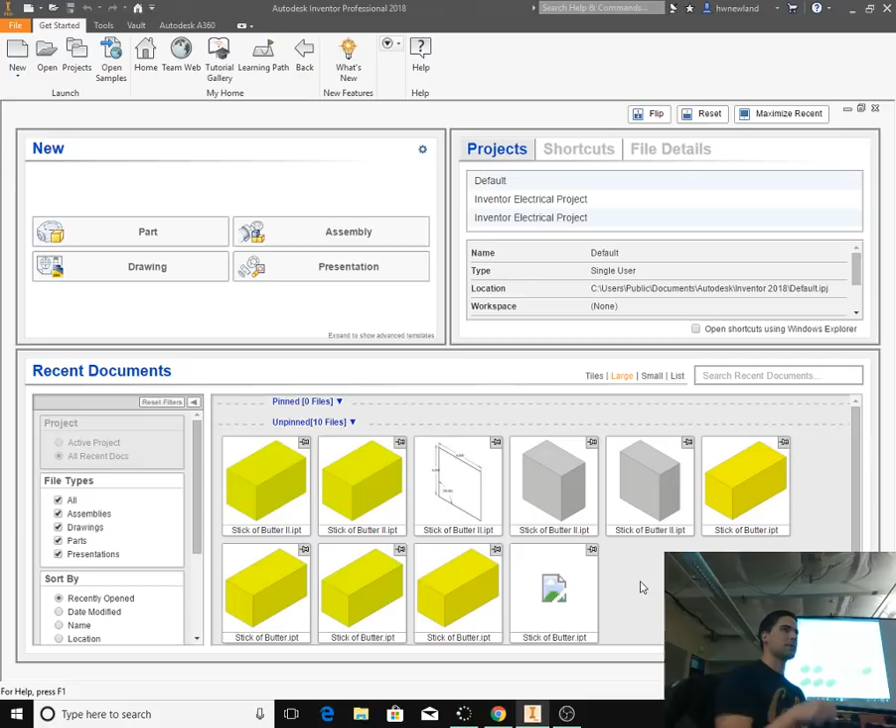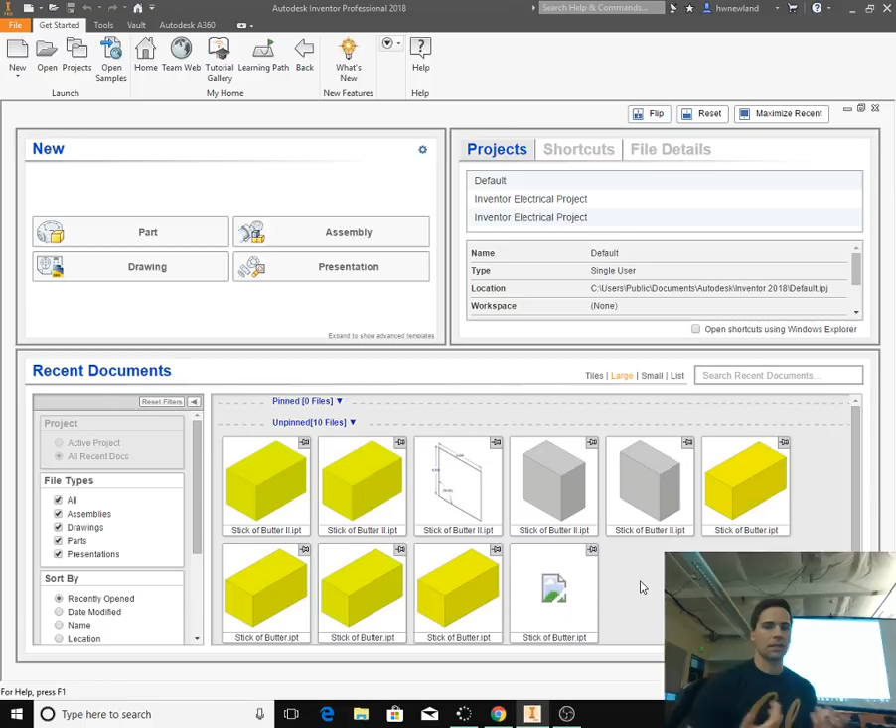So I want to make sure you guys understand how to create a sketch, come back the next day, and edit the same sketch. I noticed in a few periods students didn't quite get the gist of it, they raised their hands while typing, and when they brought up the sketch, they thought they were going to start a new sketch to finish it off. We don't want to do that because then it's not going to extrude. So we're going to practice that.

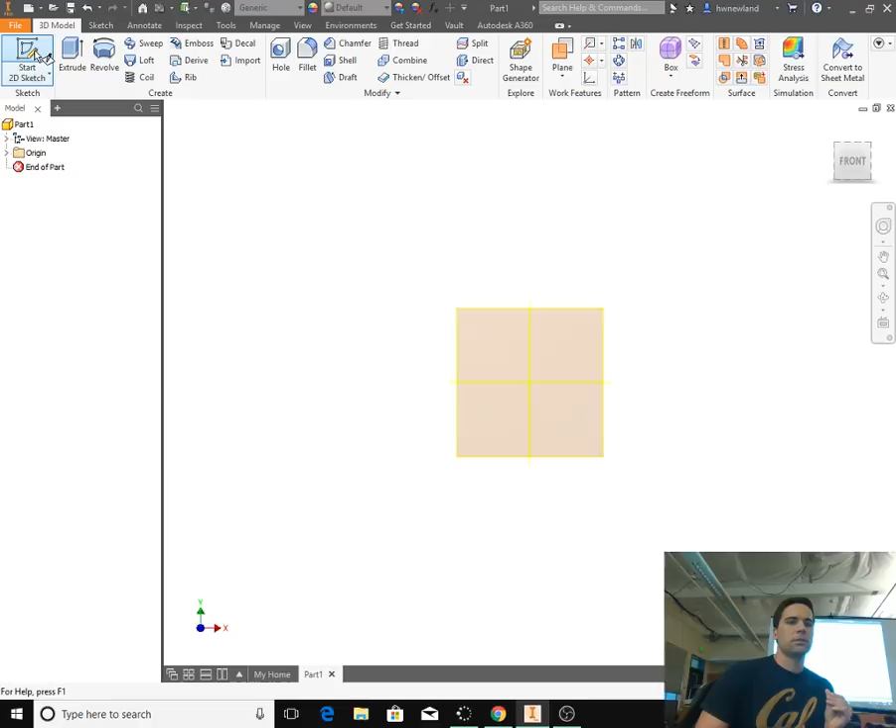I want you guys to create a new part. So create a new part. And we're going to start a new 2D sketch on the XY plane. So when yours loads, start a new 2D sketch on the XY plane.

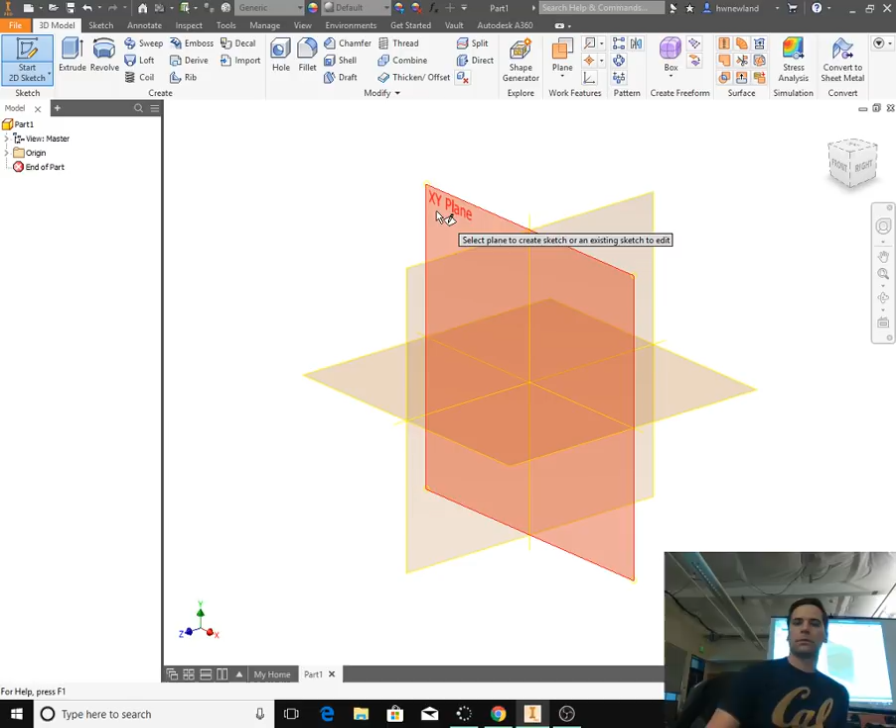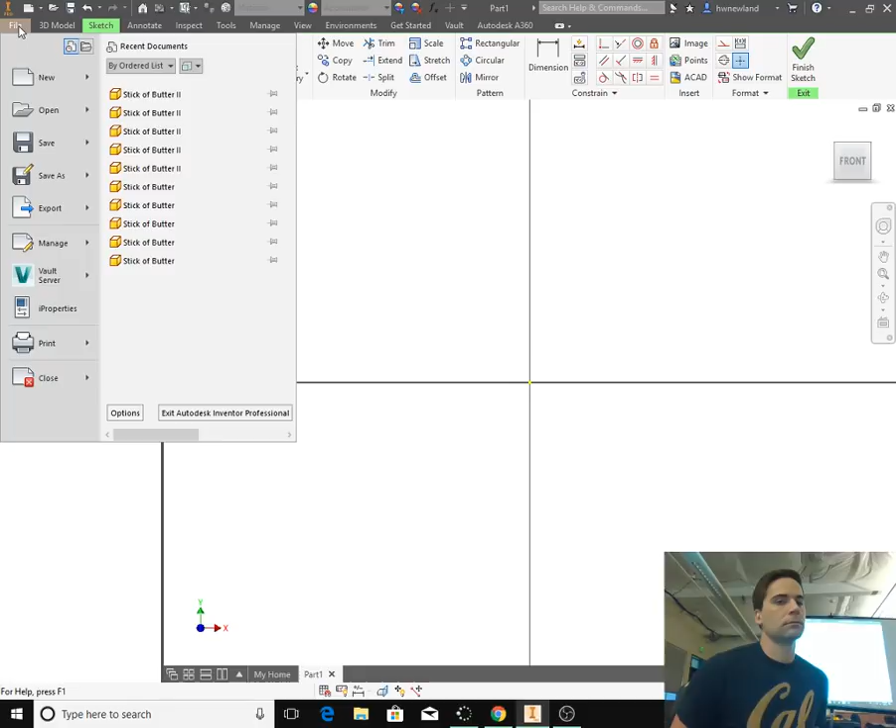Okay, so we're on the XY plane, and we need to save first before we start doing anything else. So let's go to File, Save As.

And then you probably have this pop up: you cannot save part 1 in sketch mode, would you like to exit sketch mode and continue saving? This might happen to you, and it's part of the reason why I wanted you to see this, because if you're in sketch mode and you don't finish the sketch, it's going to ask you to finish the sketch and then save it.

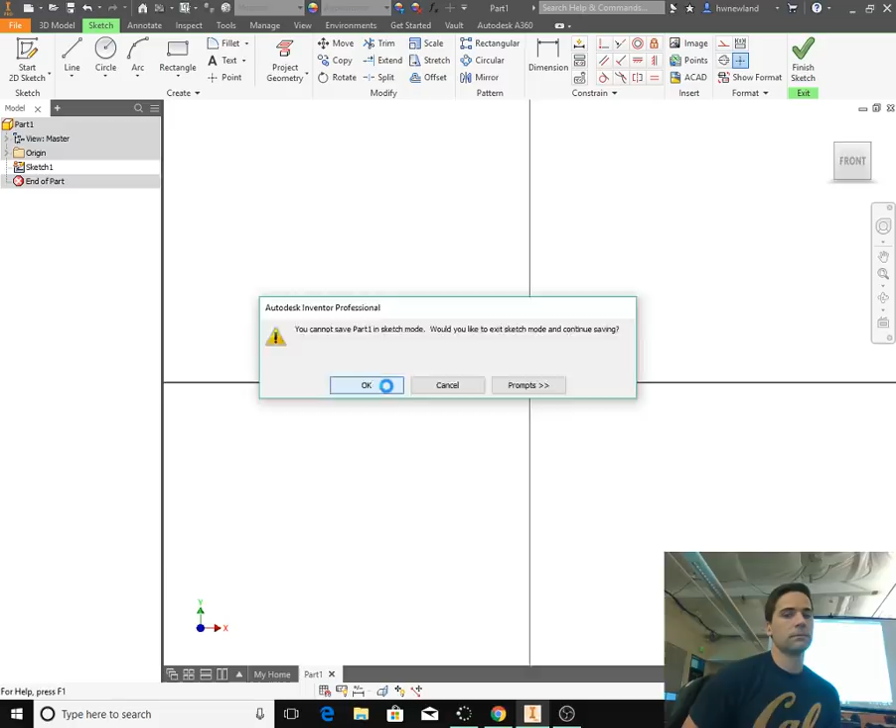So here's what we're going to do, we're going to click OK. And when you clicked OK, what happened, you probably didn't see this, but it switched from sketch to 3D model. So it basically hit the green check mark for you, which puts it back into 3D model.

And I want you to save this as, so this is not period 7, this is period 1. So Intro to Autodesk, that's where you guys save yours. Make sure it says Intro to Autodesk right here. I'm going to click on period 1.

And let's just write practice saving and opening. I'll zoom in. Practice saving and opening, we're just going to call it that because that's what we're going to try and do.

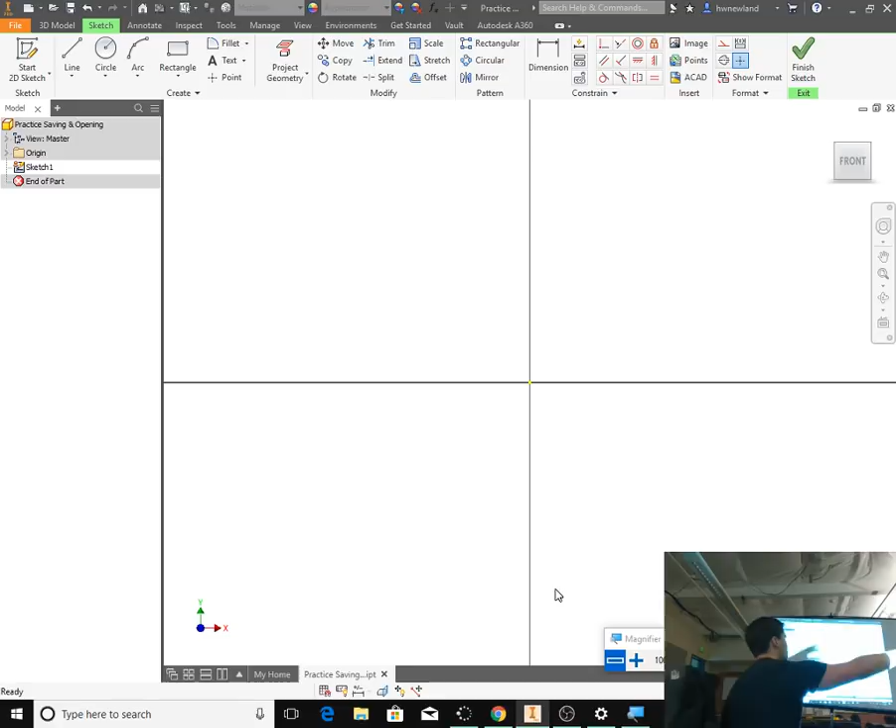The XY plane should come back. So we right click on sketch, we hit edit sketch, and then it brings us back to the original sketch that we were working on before we hit save.

So we're just gonna create a really quick shape, and it's gonna be different. I want you to pull down the plane so that we have quadrant 1.

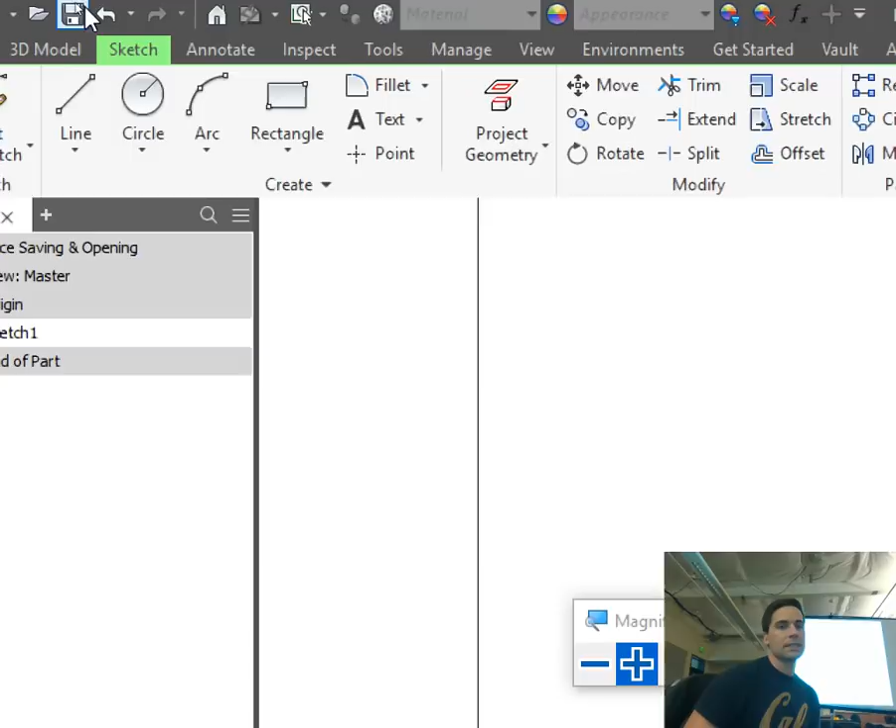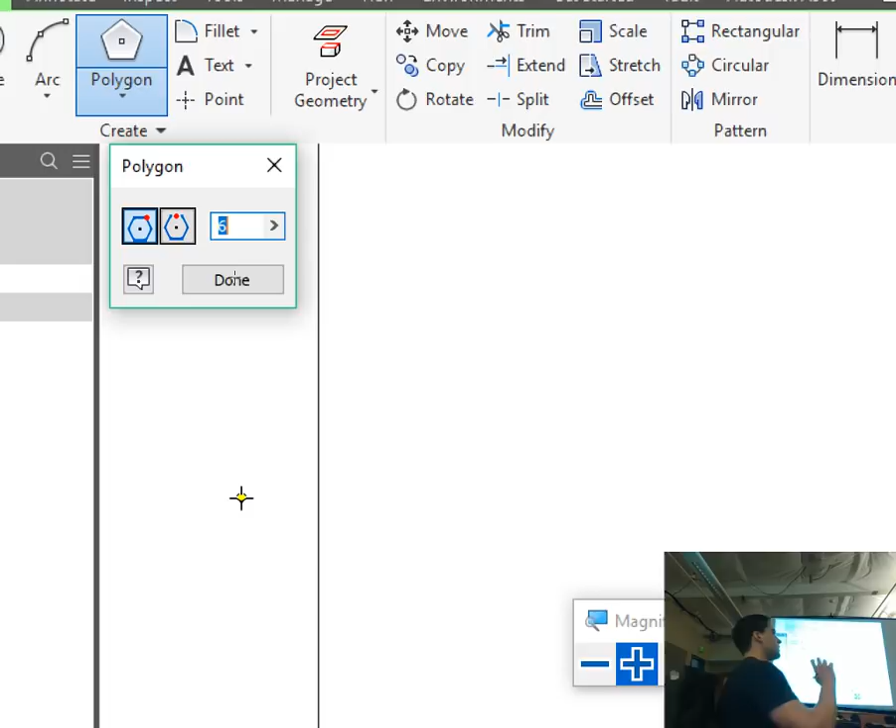And then I want you to choose this time, instead of rectangle, click the drop down arrow. I want you to choose polygon, it's at the very bottom. Choose polygon, and then notice this menu shows up asking you how many sides you want your polygon to be.

Let's try to make a triangle. So instead of 6 sides, let's change that to 3.

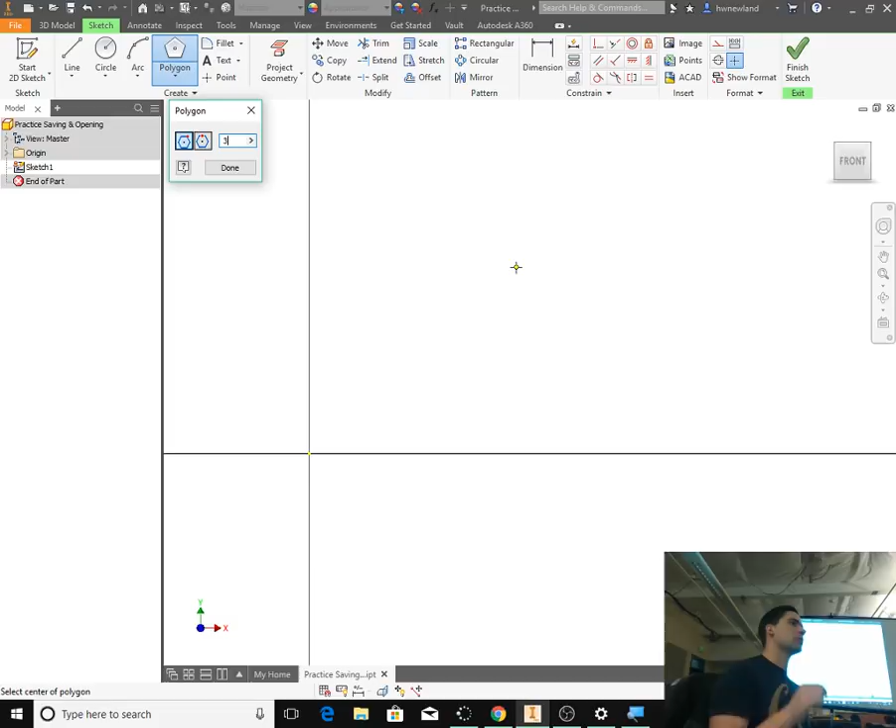And then I know some students want to be exact with how I do this. I just want you to create a triangle in this space, and the way you do that is you click, then pull your mouse out, and you'll see this triangle expand, and when you get it large enough to where it sort of looks like mine, you just click again.

So watch, I click, you see this triangle, it's kind of going into quadrant 4, which is fine, and then I just want you to click again. Doesn't matter, this is not what we're focused on right now. I just wanted you to make a shape so you can see what we're trying to do. Just make a triangle in this general space, please.

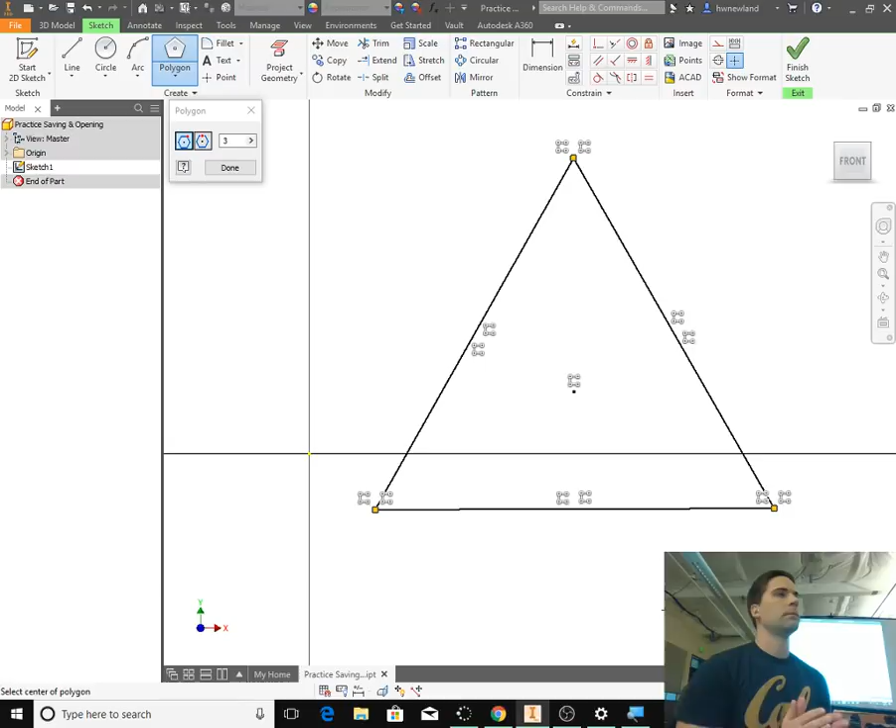And then as soon as you do that, you can click done on that little window, and notice how the window goes away, and then we're not in polygon mode anymore.

So just create a triangle, that's it. Please don't spend a ton of time trying to make it perfect. Just click, make a triangle, click again, and then click done.

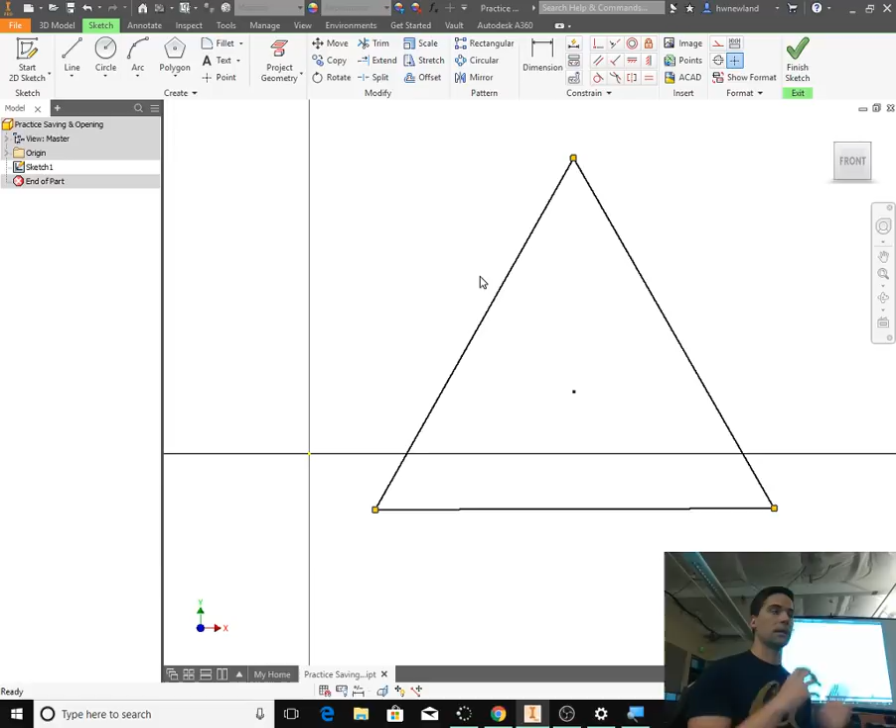Expand it out, click. Just waiting for a few of you. Just make a triangle. Click again. Good, just keep it like that. Doesn't matter if it's off kilter. Mine's a little bit rotated, I can tell because this line's not completely straight right here.

And then let's say we're trying to do this the whole period, and then class is about to run out, so we hit save. So everyone hit save.

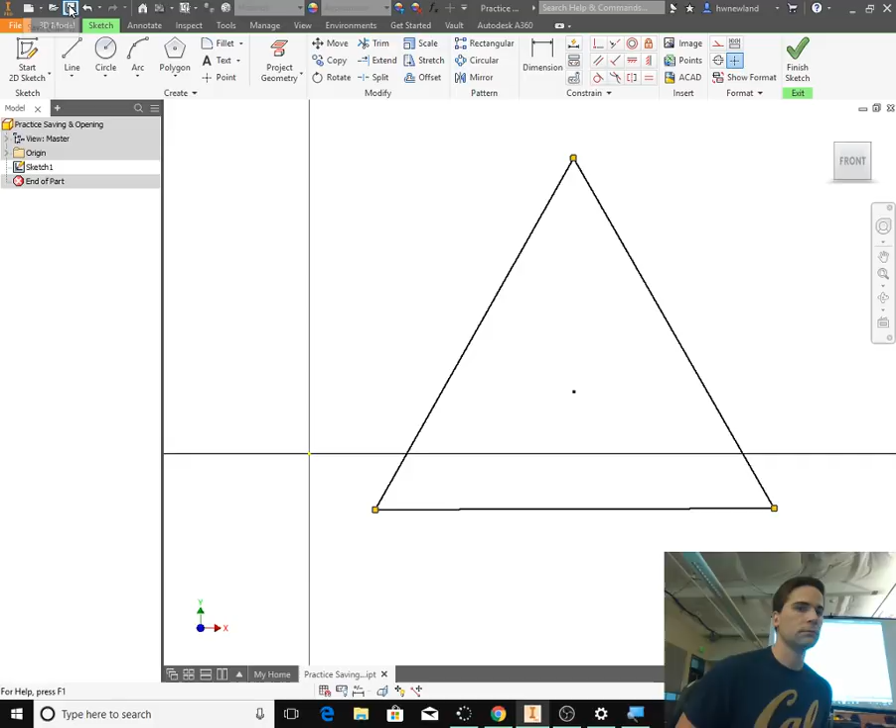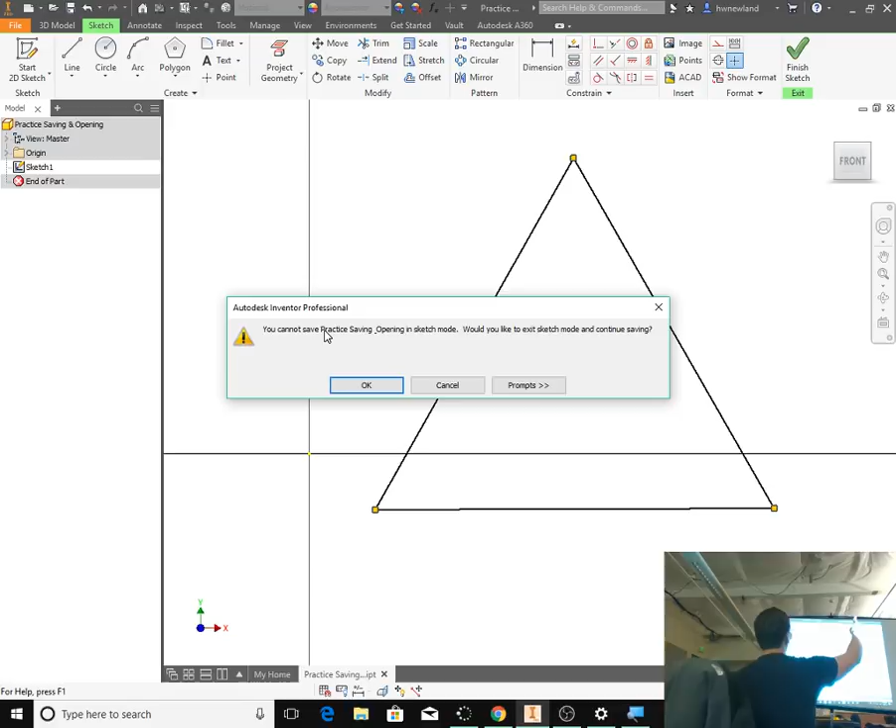And again, we have this thing pop up, right? It's asking us, you cannot save practice saving opening, that's the name of the file, in sketch mode. We can't do that. If we click OK, it's going to save it, but it's going to take us out of sketch mode. So watch, as you click OK, it's going to switch from this tab to 3D model. So everyone click OK.

Notice how it switches. So do that. We're going to pretend like we're leaving class, we're going to close Autodesk completely. You hit the X, it closes it, it's not there. Close Autodesk completely.

So this is going to happen. You guys are going to make complex sketches. You might not finish the sketch to where you're going to extrude it, so you have to save it when it's just a sketch. And then you want to come back the next day and continue on the same sketch. Otherwise, you will not be able to extrude it correctly.

So let's pretend like we come in the next day. We're going to reopen Autodesk Inventor. So reopen Autodesk.

And then let's wait, I'm going to wait till everyone has that little menu up there. So hopefully it probably shows up in here is my guess. I think you guys see it right there. Notice how it looks like a sketch, it's not like our stick of butter here, which actually has the extruded object in the color.

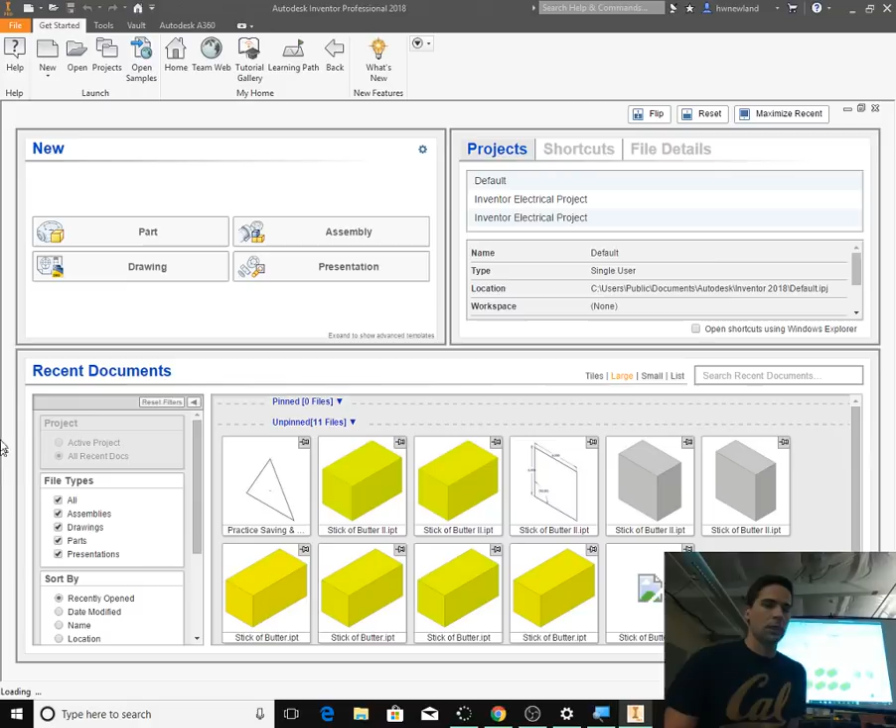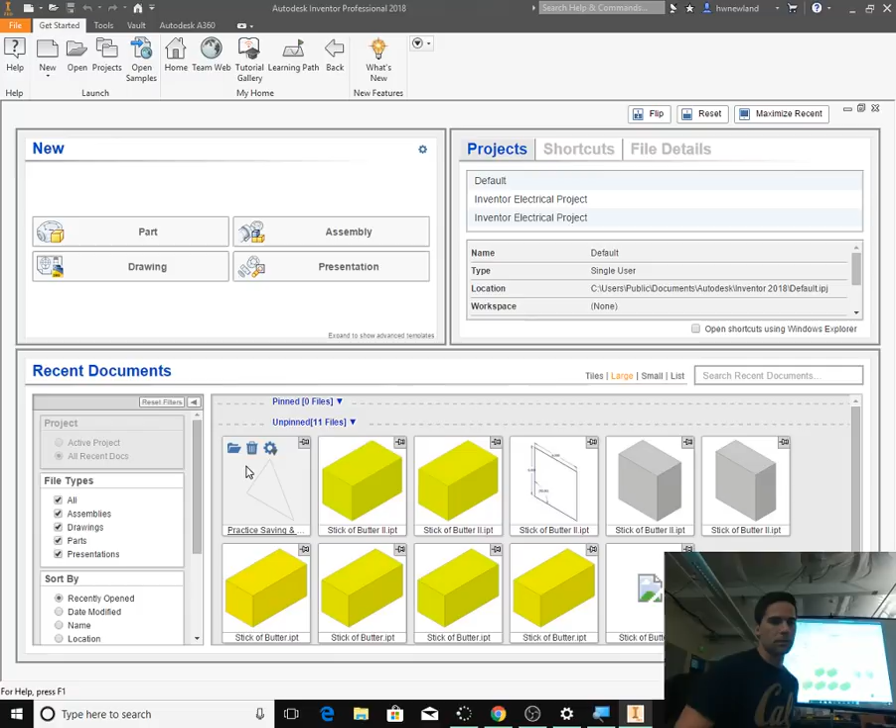So there's a few options. Again, we could click down here. I've shown you different ways to open parts. We've chosen the folder up here and opened it from the file. And then there's also this option down here where if you see it, you can open it from there. So let's try it this time by going down here, you see the folder, click open, and it should open this.

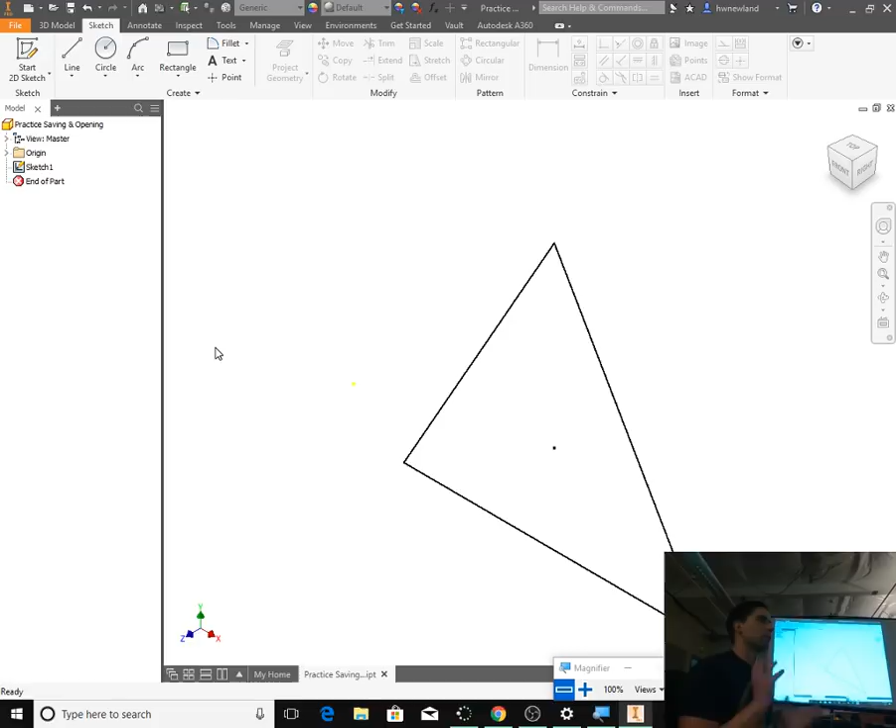And then here's what I want you to notice. As soon as you open it, it's still in 3D model, right? It's not the sketch. This is where students try to start writing on this, and they end up creating a new sketch in order to do that. That's not what you want to end up doing. So you're all in 3D model mode right here.

Again, what we want to do, we see sketch 1 right here. We want to right click on sketch 1, and what do we hit? Edit sketch. That way we're back to our original sketch. We're not messing around, we're not layering different sketches on top of each other. Otherwise, it won't extrude correctly.

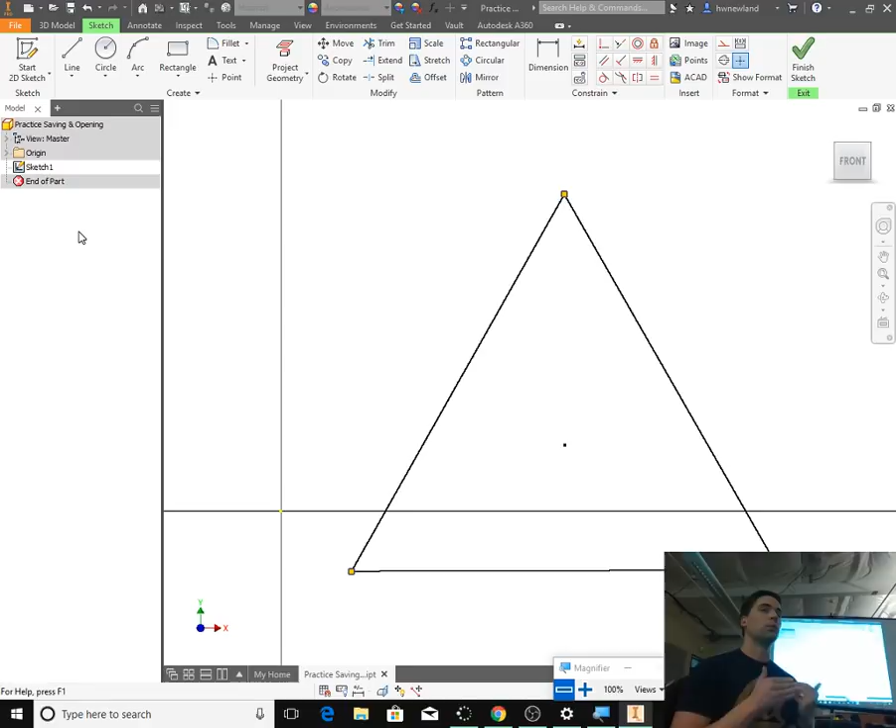So let's make a quick edit to this triangle. Let's choose the dimension tool. So dimension, and I just want you to choose one of the sides on the triangle. This is an equilateral triangle, meaning all the sides are equal to each other. That's the polygon tool makes it that way. I want you to choose just one of the sides since they're all equal. And you click, I think you have to click twice, and then drag out the dimension.

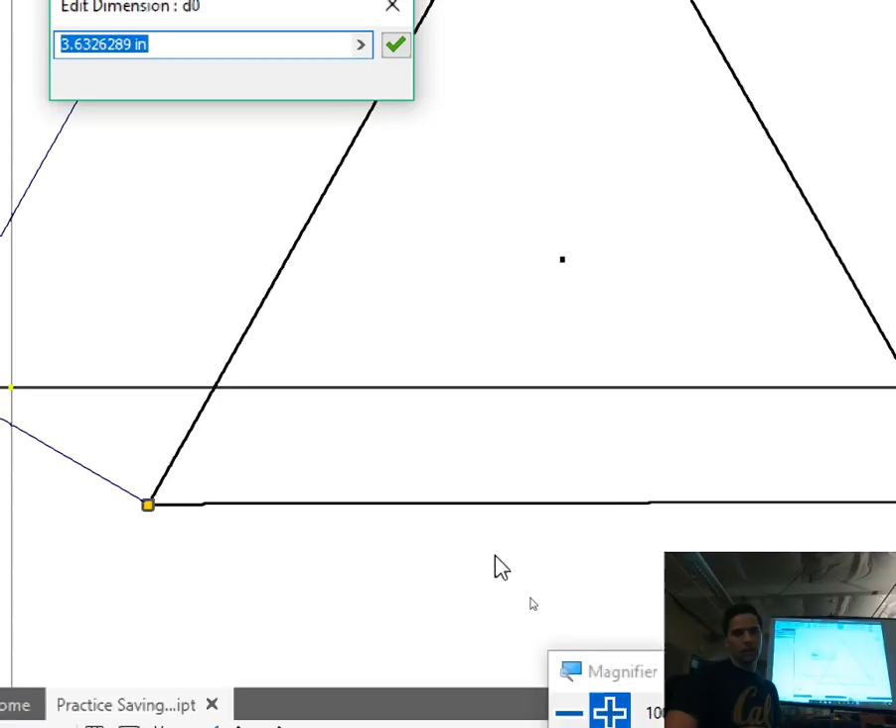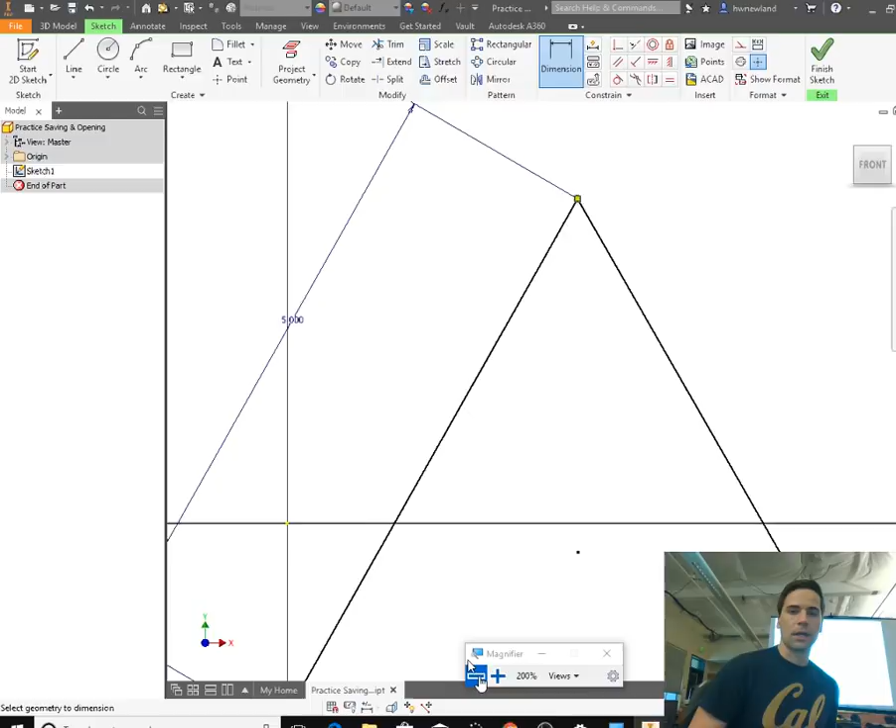So if you notice, mine is 3.6326289. Let's change all of our triangles to 5.0. So if I change one side to 5.0, it's going to change the entire triangle. I'm going to hit enter. You'll notice that your triangle, depending on what the size was before, is either going to get larger or smaller. But again, all the sides stay equal because they're constrained together.

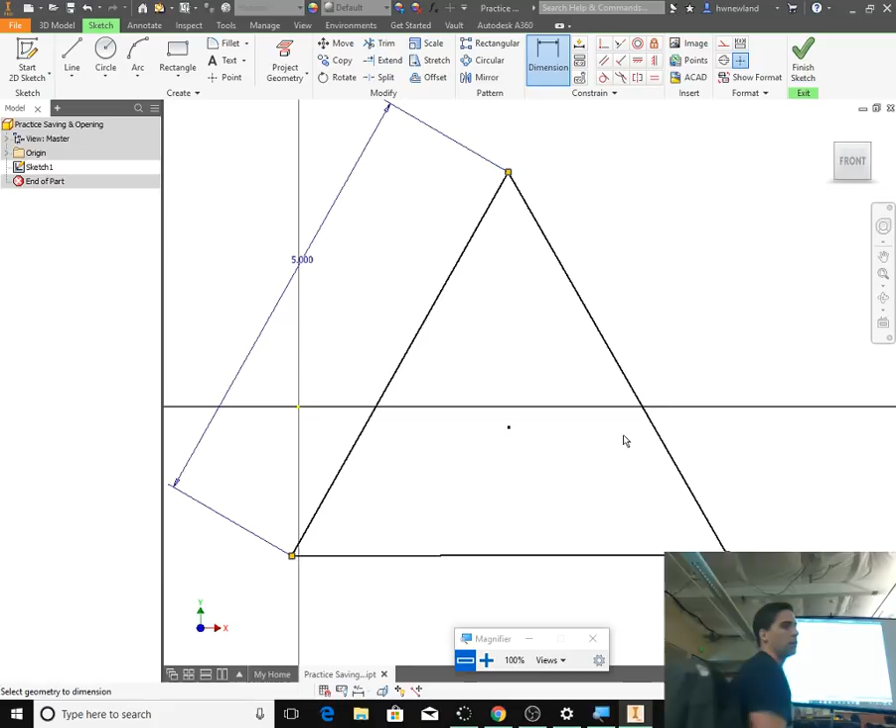So I'm going to zoom out, center it. Make sure one of the sides is 5.0. I used dimension in order to do that. And then once you change one of these, you'll notice, actually, if I delete that dimension line and I check the other ones, 5.0, yep. I can delete that. I check the bottom one. Oops. 5.0. So, equilateral triangle.

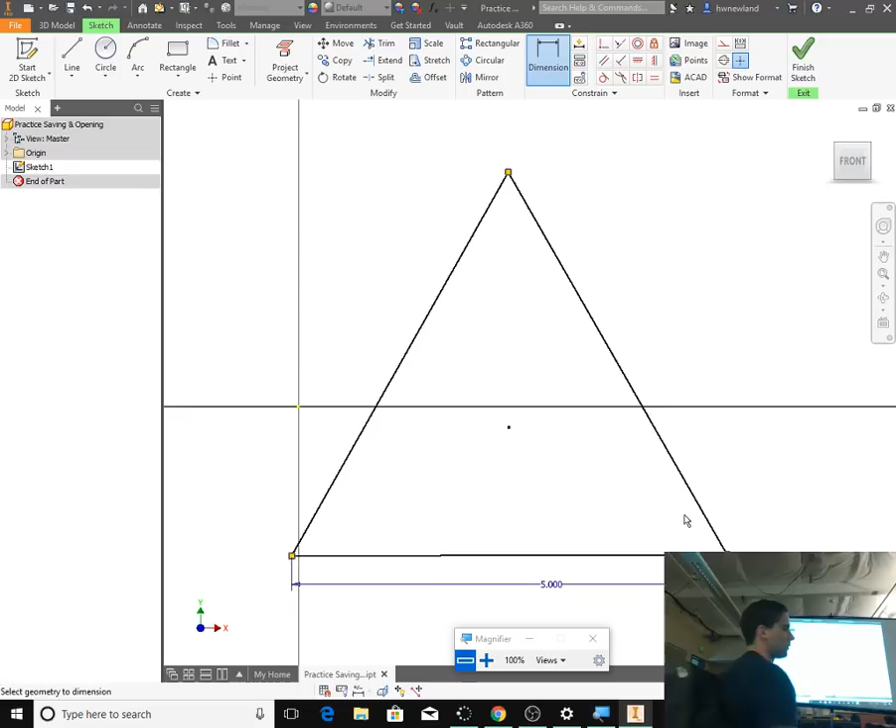I want you to this time hit finish sketch. So like we came back the next day, right, we didn't quite finish our sketch. There were a few edits that we needed to make. This time we do hit finish sketch, and I want you to extrude it to 10 inches, so 10.0.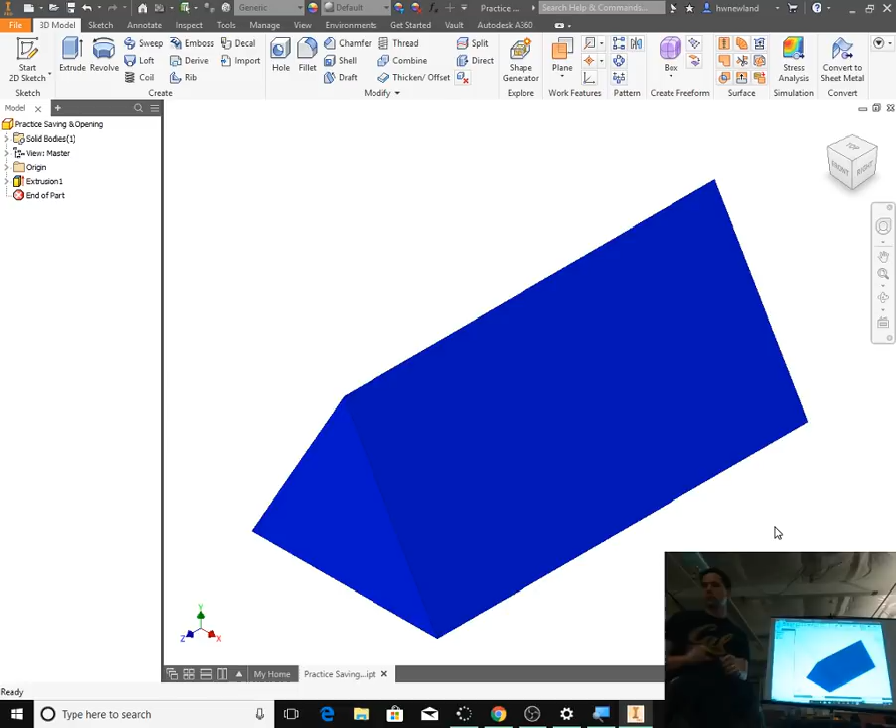If you change one side, it changes all of them automatically. Then as soon as you have one that says 5.0, the whole thing, or all of the edges, are 5.0, you hit finish sketch. And then I want you to extrude it to 10 inches and change the color. You can make, today, you can make it whatever color you want. You could make it multicolored if you wanted to. Go back, change some of the specific panels.

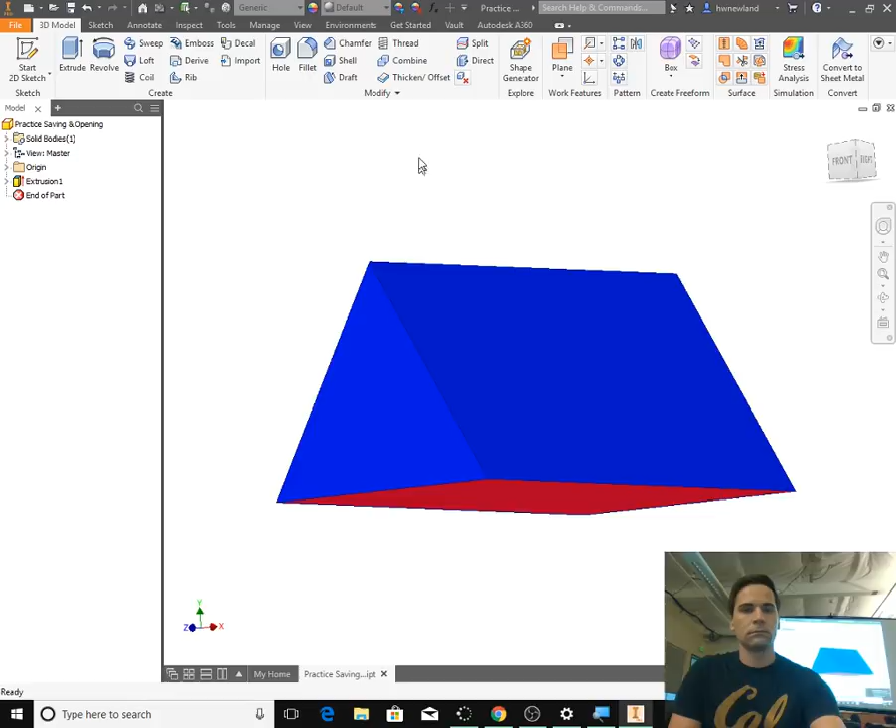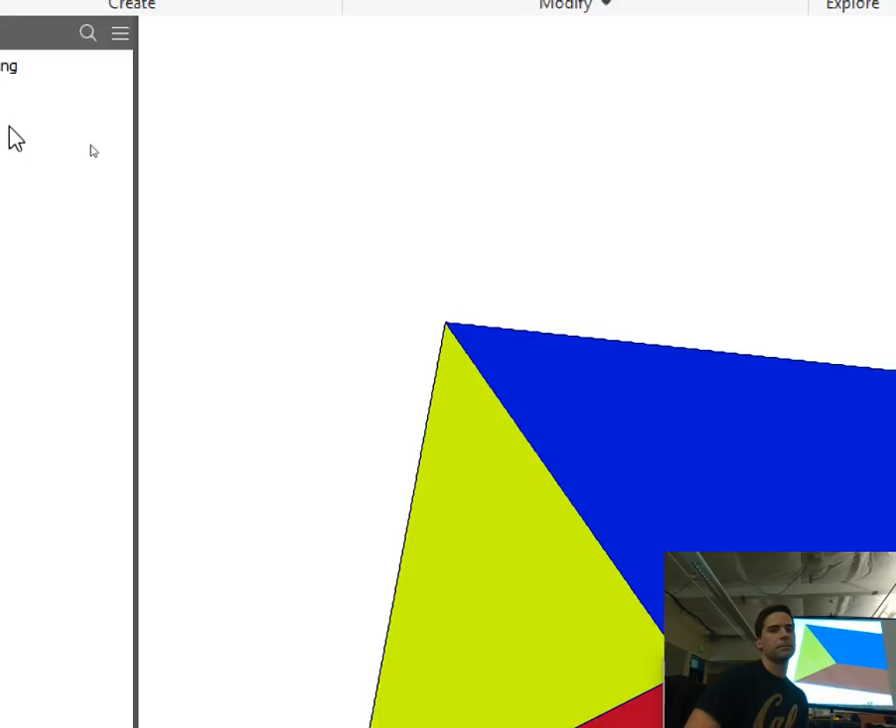As soon as you get to this point, you can hit save again. So make sure you hit save. Remember, when we just click the save button up here, it's updating the current file, it's not creating a new one. It's just updating the current file. So anytime you make a significant amount of changes, I would click that button right there to make sure the file is updated.

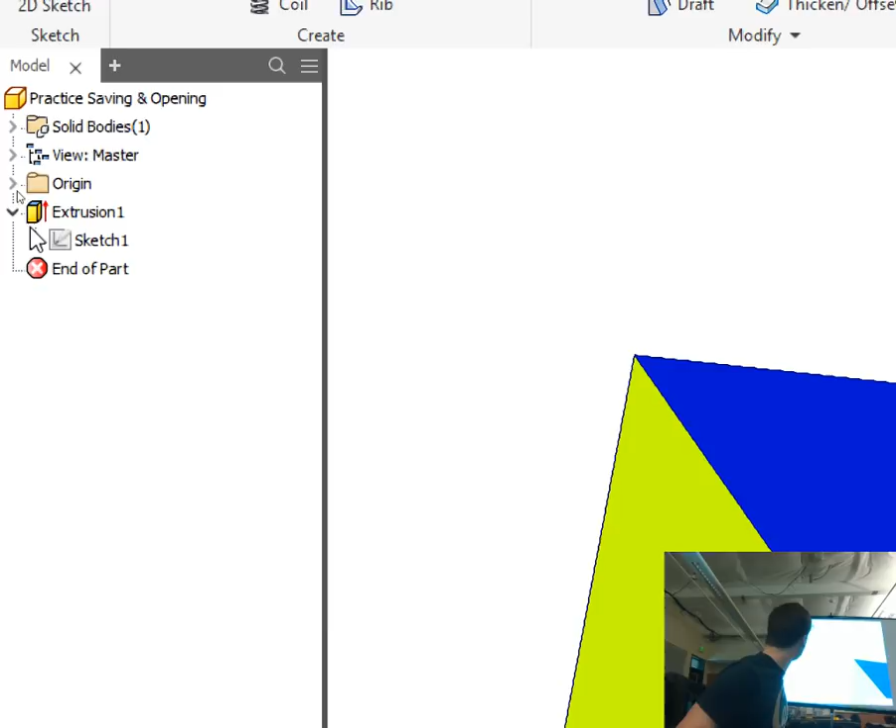So the keys that I want you to take away from this are, you're going to come across a scenario where you try to make a part during class, like let's say you have to make the coil slide, which is a complex thing, it might take you 2 days to make that. If you're still in Sketch, you need to make sure that when you come back the next day, you're still editing the same exact sketch. You do not want to make duplicate sketches. One of the things you can look at is if you start noticing multiple sketches here, that could be problematic, and I would raise your hand and check. You should really only have one sketch when you're making these parts.